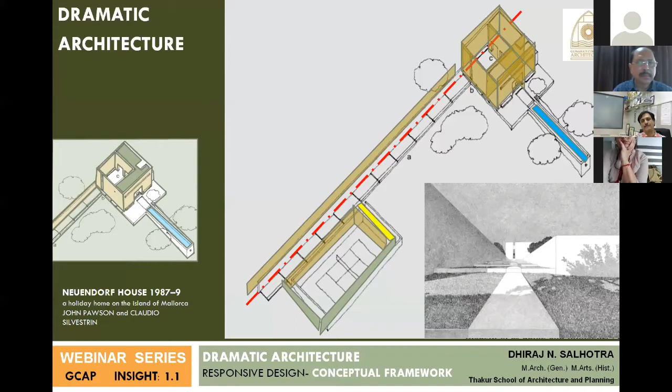Now let us see how is the pedestrian experience, the experience of the person who is walking, what is the idea behind it. Notice there is a lot of approach space, a lot of distance between the built form and the main entry, and this wall gives the sense of direction, blocking the view from one side.

As the person starts approaching from the lower level, the vision is blocked on one side, and as he steps up, gradually the landscape around starts to come out. That is how drama is created in this spectacular piece of architecture.

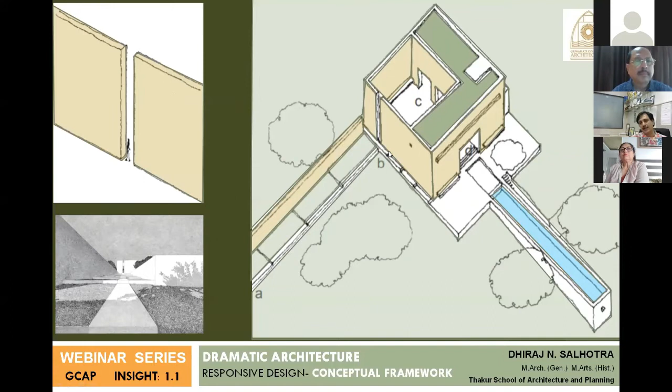This is the point of entry. It is a split, a narrow split entry which happens at point b, which you see here on the left side in that image. That split has the glass facade, the main entrance door of the building. This is the point of entry.

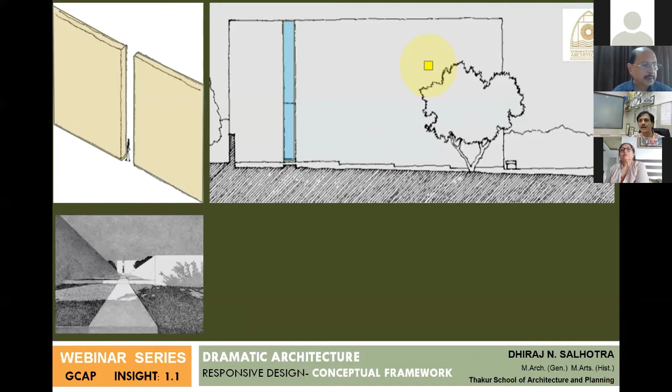Another interesting feature of this design is the square cutout, remotely and very carefully placed on the wall, so that when sunlight comes out of it in the early morning hours, it creates a glow. That is where climate responsiveness and architecture come together to create a drama of shade, sun, and light. Now this is the detailed cross-section of the building.

This is the main axis. This is the section which we referred to first.

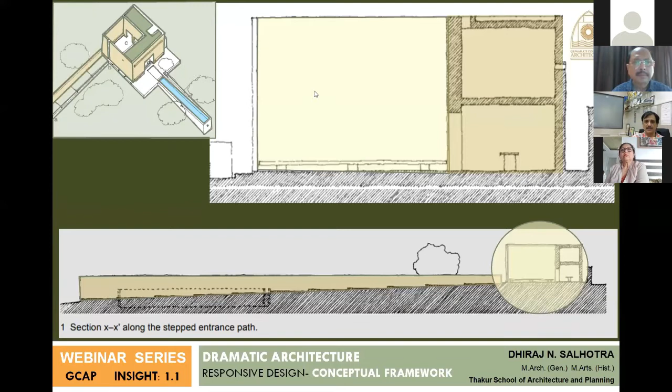Now let us see how that vista is created. This is the indoor courtyard, and this is the portion from where there is a swimming pool created, and how that vista works.

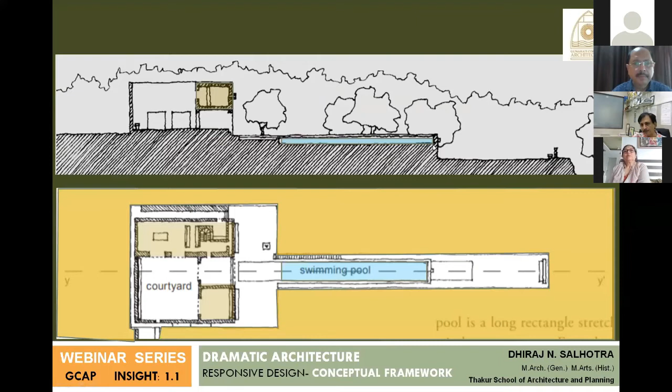You can see the visual lines, the sight lines of the user, are considered to frame the vista at this particular juncture, which is below the sectional space of a room above. And then that frames the view of the water body and the landscape further.

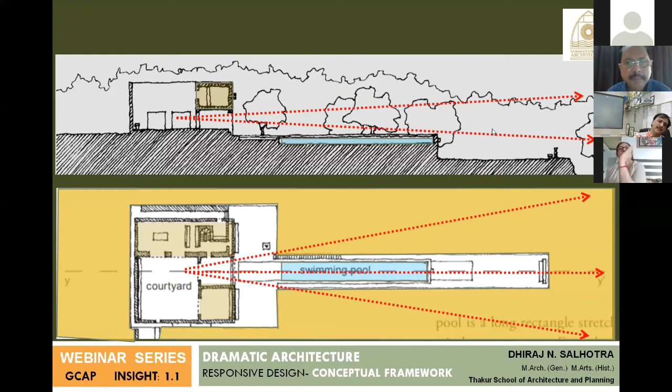So at this point, this is the framing. This is a visual frame, which you will find very commonly used in buildings of Charles Correa and B. V. Doshi. They have explored this idea of creating visual frames, popularly called vistas. Framing views is called a vista. So this is how a vista is created in architecture.

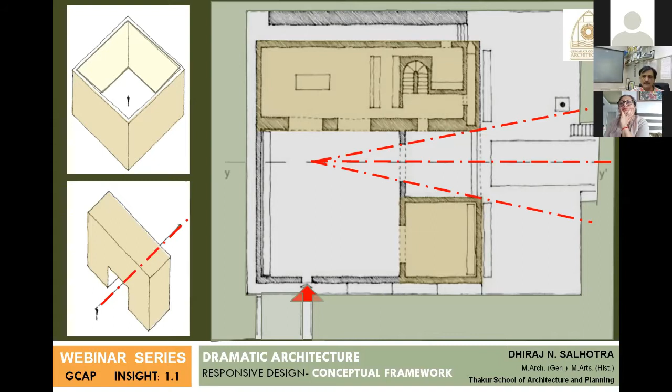So this is a standpoint, and you can imagine this is the kind of view the person is able to get - the floor line, the pool, the position of the eye level. When these elements come together, we are able to create a poetic scenery, and this poetry of architecture is what creates drama.

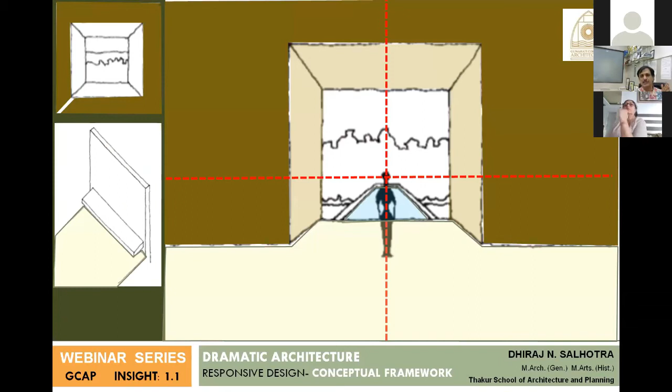Now, how can we create dramatic architecture? This is a question that many students would have. We have seen an example how it is done. Now let us understand how this dramatic architecture can be achieved. If you have pencil and paper, you can note down - I am going to share with you 10 basic tips on how to dramatize architectural spaces.

The first tip is to understand the cone of vision. Whenever we are looking straight or towards a wall, along that straight line, our cone of vision is 15 degrees above and 30 degrees at the ground. Once we understand the cone of vision, we would know how to frame spaces and how to create vistas. So your sight line of visibility is the first factor. While designing, we must keep in mind the cone of vision and how we are going to frame these spaces.

This is tip number 1. Note it down. We'll go to the next tip.

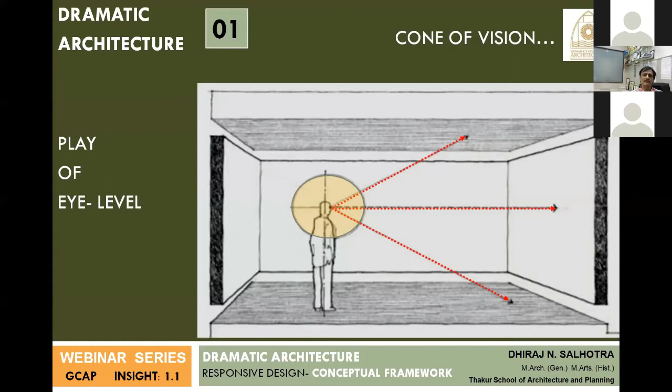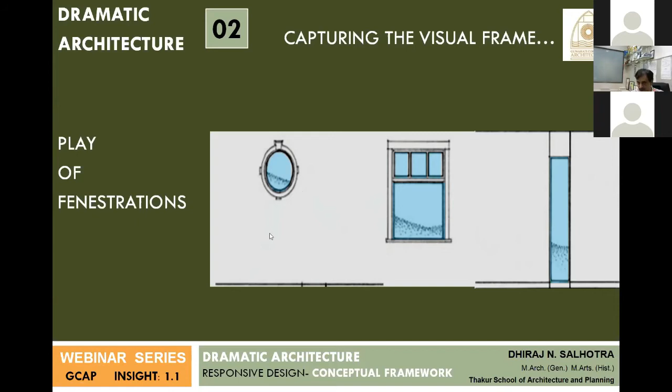Next is where we place the fenestrations. How we place them basically determines how the landscape would be viewed. It is not essential that the full landscape must be visible in a single view. How you frame it, at what level is the window, what is the dimension of the window, whether it is a slit window, whether it has a sill level, whether it is a raised window - these are all conscious decisions in dramatizing the space of architecture. So capturing the visual frame is the second tip to keep in mind, depending upon the height, location, and width, determining how that particular space is going to be experienced.

If it is for a single person viewing window, whether you are going to peep, watch, or sit and enjoy, all these adjectives depend on the size of the opening, where you have placed it, and how you have managed it in the interior space.

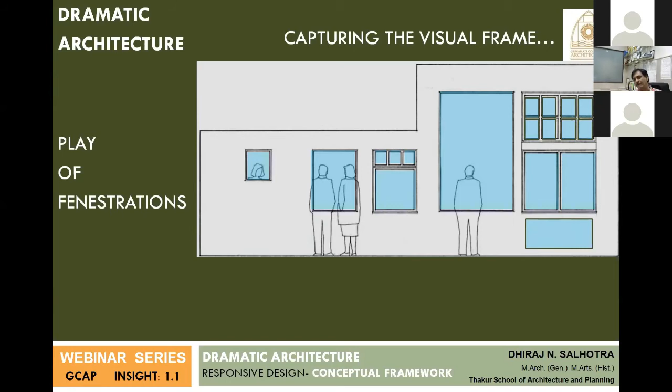If there is a small toddler or kid, the window on the right hand side at the bottom becomes an essential element. If we are not providing the small window at the bottom, the kids are denied of the outdoor view. This is one thing designers must take care of. This is one of the elements, the play of fenestrations, so capturing the visual frame is very essential.

You can see here in this example, there are 2 blatant examples. One on the left shows a framed view of a castle far away, a distant vista. There is view of the landscape on the left, and then the view of the sky, partially viewed. So the wall becomes like a photo frame, capturing these vistas. Play of fenestrations is very important.

Instead of just placing windows in a sequential manner, one after the other, or just placing them on the walls, you can decide the visual frame that you want to offer in your design. That can add drama to the site. But first you have to be there on the site, see the sight lines, decide how you can play with it, decide the size of the opening, then place them.

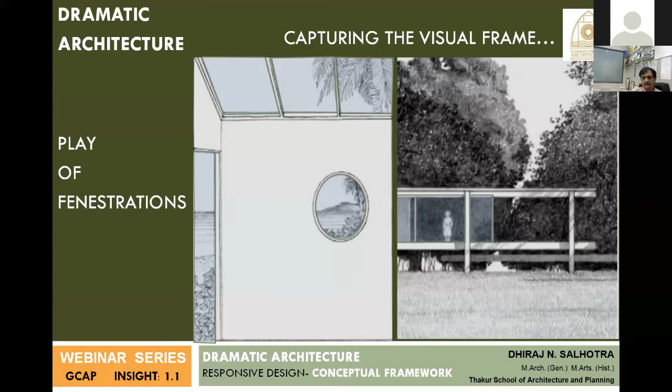Articulation of view frames. Note down this book by Rob Krier, which is on architectural composition. If you go online, just Google robkrier.in or .com, you will find this ebook available for online reading. The PDF copy is also easily available. You can download it, but definitely go through this book on architectural composition, because it offers different types of solutions on the effect of space and vista and position of openings.

It's a complete reference manual you can go through, say one page a day. This book has enough information for helping you understand how articulation of visual frames is done. I've taken 3 examples from that book. You can see how the ledge on that window in example 1, the framing columns right at the entry, or framing columns at the end of the vista, are used to frame the view in a particular manner. These tips are given by Rob Krier, who has several books, but the first one to pick up is Architectural Composition.

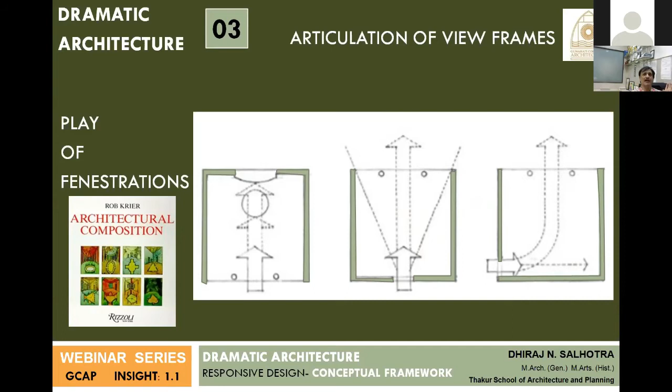Next, the important thing is play of levels. If you refer to how Corbusier talked about the Modulor man, levels are very important for us. You must know the rule of 3 inches: plus 3 inches, 3 inches, 3 inches, 6 inches, then 1 foot, 1.5 feet, then 3 feet. Using this 3 inch measure as the baseline multiplier, you will understand the various levels.

If you provide something at this level, people are automatically going to use it for sitting. The moment you raise it to waist level height, people are going to place their hand and stand like this. If you raise the wall slightly higher, the manner in which people place their elbows over it is completely different. So this height of walls, half walls, low parapet walls, or railing components, the way the height is fixed, changes the experience of the user.

There is a very important proverb where the handle of a building is called the handshake of the building. The handle is the first handshake the building gives you, so it is important to design it well. If you refer to the book of architectural details by Le Corbusier, you will find that every element he designs in a building, he places a lot of importance on all the surfaces which meet the user, especially the door handles and railings.

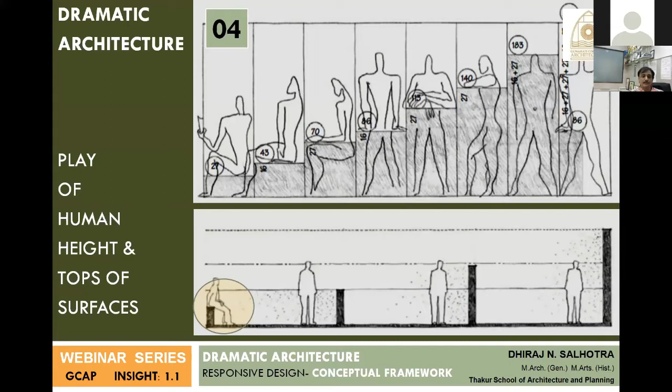The next is impact of levels, whether the space overlooks an area or the space is getting overlooked. This is very critical. Unless there is a play of levels well thought out, the level difference must be such that it should give you an opportunity to be overlooked, or to look over certain space.

The best part of human emotion, the most favorite pastime of why people go to a mall or marketplace, is they go to watch. You must have spaces for them. If you give this, it creates a sense of belonging and social inclusiveness. So this is the impact of use of levels.

There must be hierarchy of spaces, in terms of how that person is going to view down, or how the view is going to be across, under space, and the spaces outside. So the overall degree of enclosure depends on the levels of the surfaces.

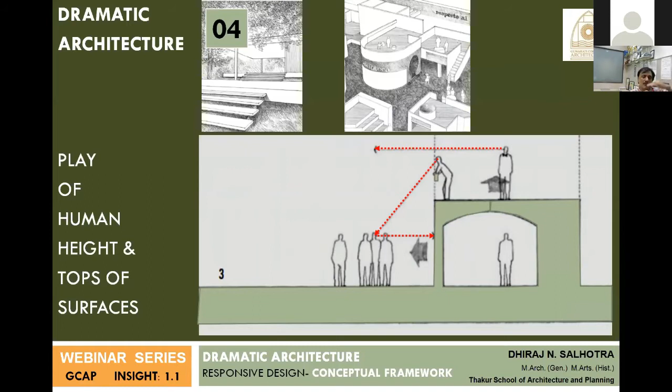We must play, a lot of play is possible in articulation, how this could be completely expressed. It could also be dramatic. You climb up to one level, then go to another, and climb up further. This makes the journey of a person from one level to another interesting.

Depending upon the scope of the project and the kind of placement where you are going to use these steps, you can make a choice of steps. Many times I have seen architecture students just taking an offset command of 300mm and putting steps 1, 2, 3, 4, counting the levels, and once the level is reached, the game is over. Instead, you can spend some time thinking about articulation of steps or staircase.

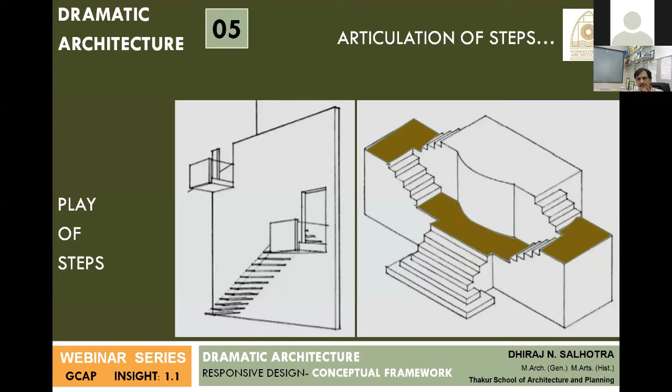I'll show you some other examples. These are numerous other ways in which steps can be articulated - it could be a straight line, dog leg, open well, half well, or L shape.

Even when you are navigating a plinth with 2 steps, longer or wider steps, this particular space becomes a space for gathering. If you are designing a bungalow or some public space, these are very critical decisions. We have to articulate steps carefully, because this is the portion every user is going to pass through.

There is a plethora of choices from which you can pick the kind of steps. When you have a staircase to design, take a pause, take some time, decide which kind of staircase is most appropriate and suitable. I bet every user will be touched by the kind of staircase you choose, because this is the most personalized travel time a person has while navigating a staircase.

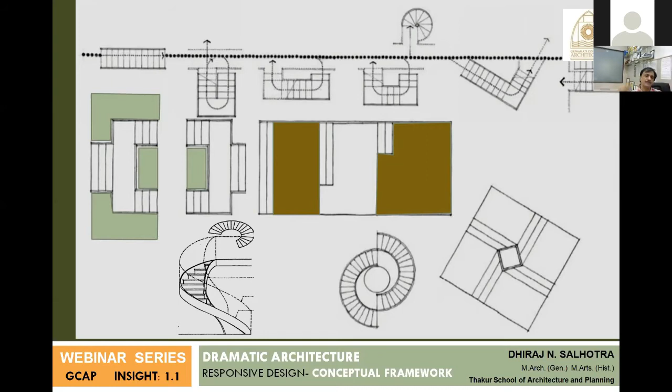The degree of enclosure has to be very well understood - what is the impact of 2 walls, one wall and one column, or one wall and 2 columns? This permutation and combination of massing is not necessarily just an orthographic projection of your plan. Sometimes you can add a wall, a freestanding column, a beam, or a pergola, and frame a visual space. This creates a transition between your interior and exterior.

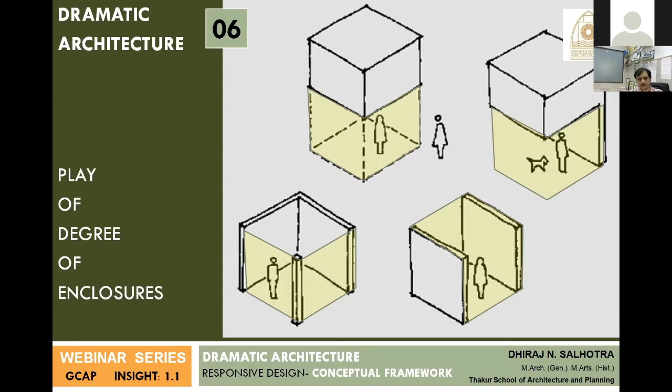A very obvious location for architecture, the obvious placement of that particular monument on top, is something which makes it monumental, but it doesn't make it dramatic. Had it been dramatic, you would probably have to shift it away from that particular top location.

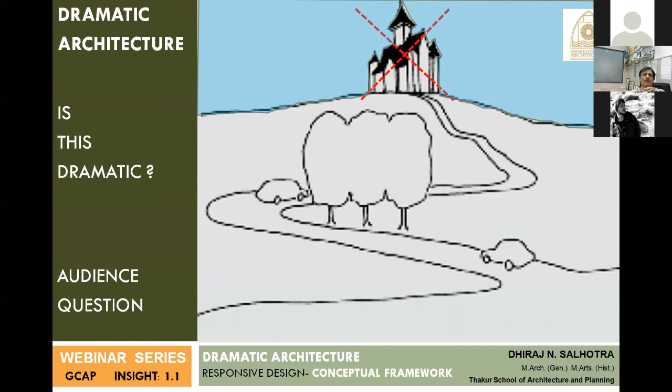This brings us to the next important tip, the big decision of how the built form is placed on the site. Now this is the view of the site. I'll show you the path of access.

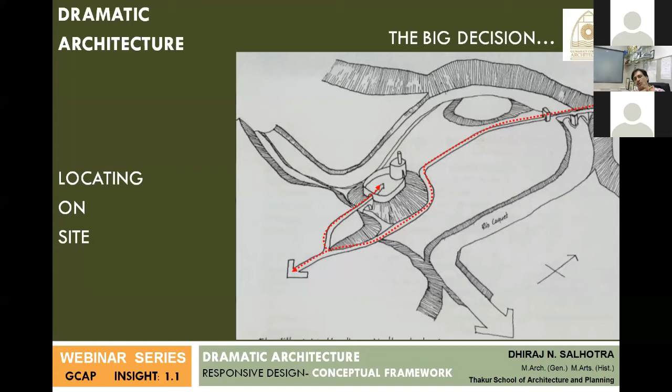So the context of the program is a critical aspect. Siting of the built form, how you place the building on the site - it's a big decision on where you place it.

Now, with the same built form, if you have a previous design project, what you could experiment is to take the same building and try locating it at different positions on the same site. If you place it straight, try placing it at 45 degrees. Try placing it at one corner. Try bringing it to the front. Then visualize your model. You will realize that changing the position or siting of the built form on the site completely transforms the view, or transforms the overall effect of the building and site.

So this is a very important tip, tip number 7, which one has to keep in mind - the context of the program. If I have to place a monumental piece, it takes center stage. If it is something which has to merge with nature, then it will merge in the landscape, it will hide itself. For solar response, you will have another kind of orientation - an introvert or an outward looking building.

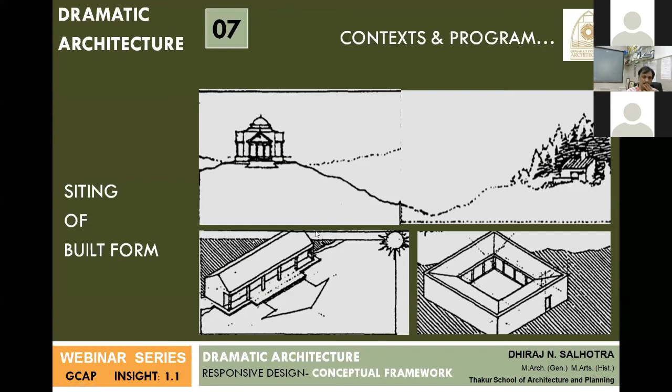This is the play - this is tip number 8. It is magic. Very few architects have great command on it. One of them definitely is Le Corbusier. However much you study Le Corbusier in terms of lighting, it's not adequate, because in his buildings he's a master of natural light in design. There's a particular statement by Corbusier - he says that he knows how to make human faces glow. It's a very strong statement because he has control over the lighting.

So light plays a very important role, and especially if you study most of his buildings, he does very good light and shade play at the entrance. I'll show you some examples of how entrances have to be designed. In entrances, just don't keep an entrance wall plain like that - play with it. Either pull it out, create a porch, or recess it back. That is what adds drama. Keeping plain entrances doesn't create any interest. So play of entrance is very important, because this is the first impression that a person entering the campus or premises will remember. The entrance is the heart of the design.

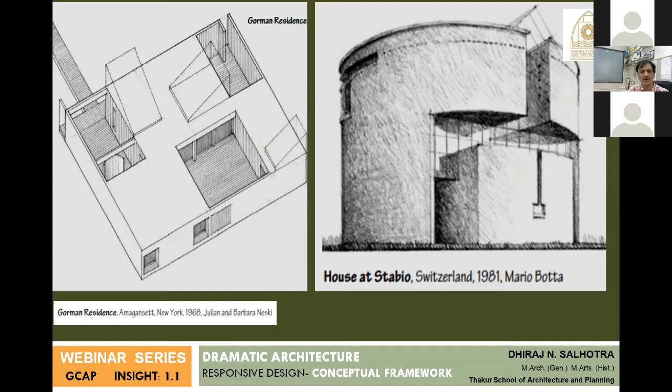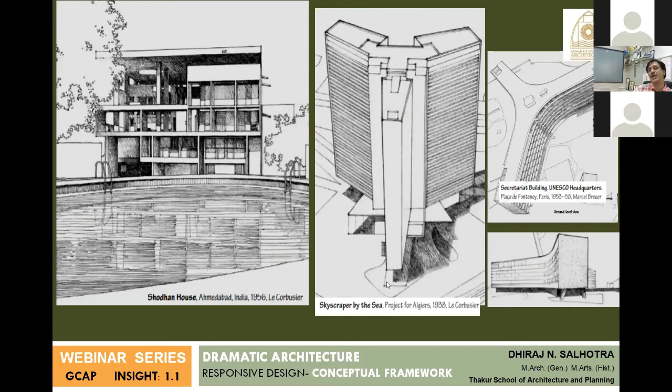Several other examples - this is Shodhan House, the Secretariat. Again, deep recessed shadow - maybe the main entry is a small opening, but see the kind of shade gap which is created.

This is an interesting picture - this is the Robie House. It is one of the most photographed buildings in the world. So many people take photographs, and whenever they come back I ask them, where did you see the entry? In fact, this is a building in which the entrance is not visible. This is the most photographed building, and the privacy of the user is not affected, because Frank Lloyd Wright - I will give you a challenge.

Try to locate the entrance in buildings of F.L. Wright. Have you noted the challenge? F.L. Wright always hides his entry to the building. You will never see a gate like gate, you will never see his main entry to the building.

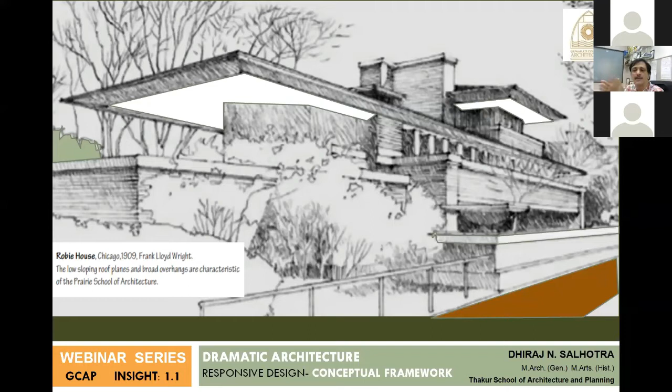Even in the Robie House, this is actually the back side of the building. This is not the front, but this is the most photographed side. You will be wondering, where is the entry located? So the entry is on the rear side. This is the portion from where we saw the image, and this red arrow mark shows the entry.

He used to always hide the entrance of the building, because the moment a person is able to read the entry or read the built form, then there is no interest. That is what F.L. Wright believes. So this is one approach of how entrance can be hidden from the main view to create the drama.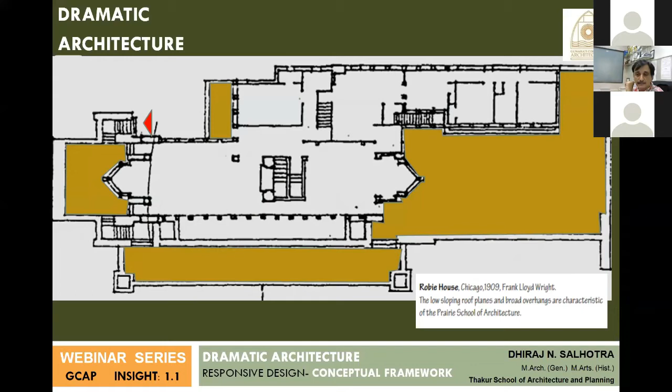Look at Corbusier. In contrast to F.L. Wright, Corbusier will make the entry as loud as possible. And look at the sheen, you can see the shine on that RCC slab that he has got. RCC as a concrete, as a material, has a sheen or a shine on it. How is it possible?

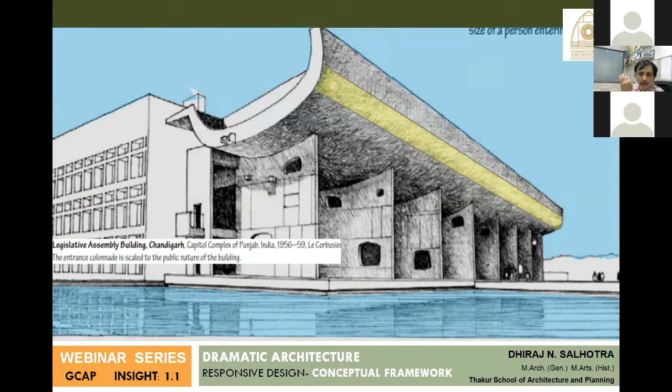This is the portion where you can see the shine. He tilts the angle in such a way that the sunlight just brushes across this particular canopy, and that allows for that surface to shine like a metal sheet. The concrete appears like a metal sheet. If you go to Chandigarh, you will find that it has that sheen on it. The concrete is able to do that, because of the shade and light and shade that he is able to achieve.

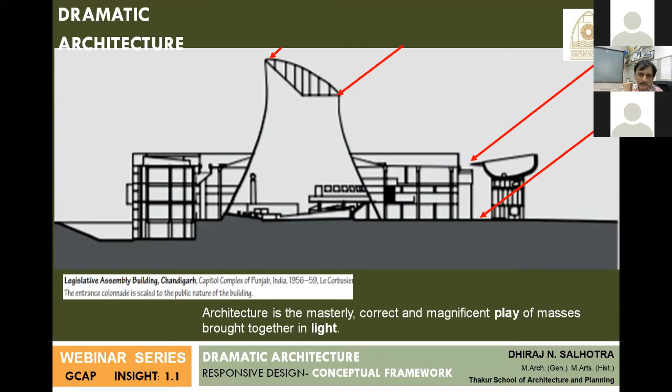Again, an example of how entrance has to be treated. The main building is behind. This is the front, the Brise Soleil detail which he has got, a very monumental piece of architecture. This is the plan of that building, this is the front area. This is Millowners' Association in Ahmedabad.

I will demonstrate how he has done the play of shade and shadow. This is the kind of light effect throughout the day, every day you will get this light effect. The shadows will start growing up. So this drama is the use of built form, fins, openings, light and shade.

The sunlight does the job. So this is the detail, these are the fins that he has added, very cleverly placed. The solar angles have been understood, the entrance area has been defined. And this is the kind of drama that every photograph captures.

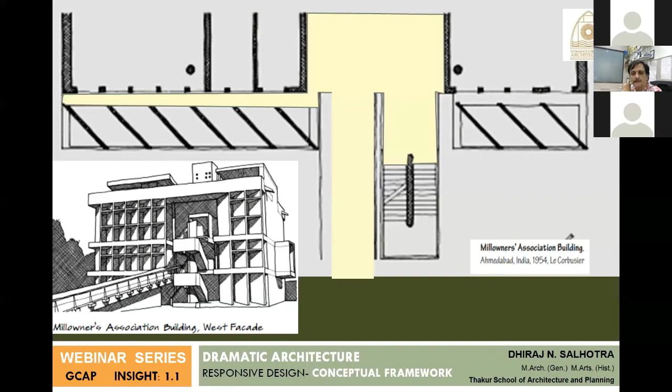This is one project which I want to give you all as homework to do: Villa Mairea, by Alvar Aalto. Not many students of architecture are a fan of Alvar Aalto, but I tell you, if you want to understand how planning is done, how a very robust concept is developed, you must read Alvar Aalto and his works. He is one of the most pioneering modern architects, very systematic in his approach. The only drawback to his architecture is it is not blatantly beautiful.

You will never find a form for form's sake. His buildings are highly functional, highly efficient. So as homework, I know architecture students have a lot of work to do, but this one project is something you must make it a point to study in depth, and that is the Villa Mairea project. It is not very difficult to get information on this project, you can Google it, you will be able to find about it.

Don't just see the images. If you see the images of this project, I'm definitely sure you will say there is nothing interesting about it. Read about this project, this is the only project that I would say one student must read. Because if you read about it, you will know how conceptualization is done, how great his architecture is. His architecture is human architecture. So this is one takeaway exercise that I want the students to take up: explore this particular project.

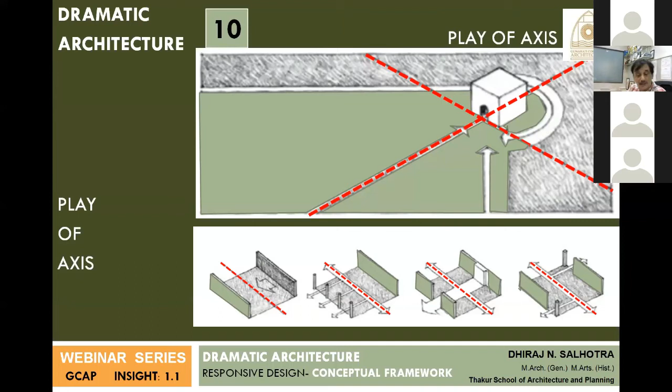The first and a very obvious axis is the frontal axis. We don't normally use this axis. Nobody wants a building which is bang opposite or right at the front. This is only used for projects which are monumental in nature, public buildings or buildings of civic significance, or important buildings like the Taj Mahal, which has a frontal axis. This is a very strong axis, and you must use it only depending upon the scale and type of project. You cannot use it for institutional buildings or for a school.

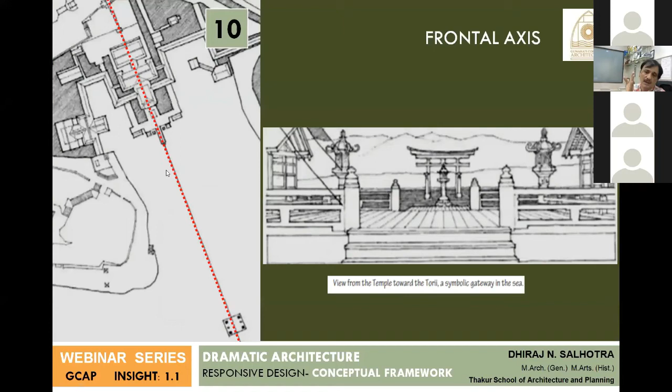Even for residential bungalows, you must avoid blatant entry towards the building. You will find this axis used for large monasteries where urban design principles apply symmetrical axis. You will find its use in projects of civic significance where formal architecture or formal geometry is used to show power. Basically, this frontal axis is used to show power.

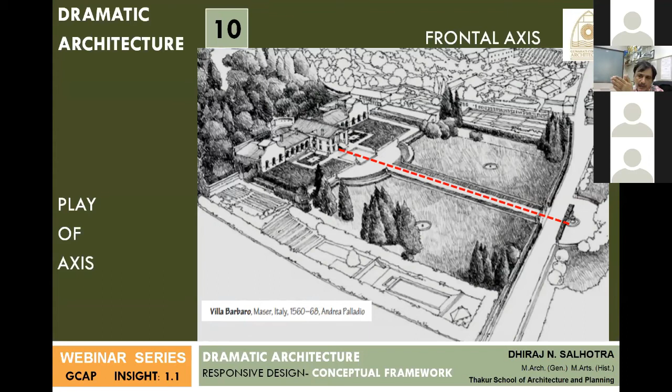Another interesting way to develop, one of the most interesting ways I would say, is to develop a slightly tilted diagonal axis to the building. When you create a diagonal axis after moving straight, it creates movement in your experience of the building. The building will start appearing as if it has rotated itself. If you have a model with you, you can pick it up and check that particular movement of the built form. You tilt the axis slightly, and the whole experience of enjoying architecture changes.

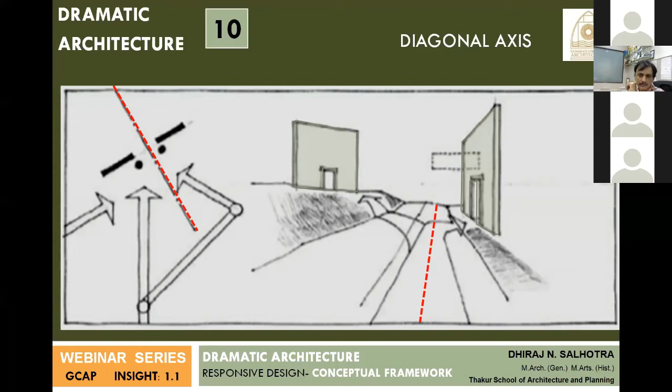You will see the use of this in Philip Johnson's Glass House. Philip Johnson has a diagonal axis to his Glass House. This is an example of diagonal axis to a lateral plan. It did not mean that your building has to fit it. You can see over here, all the buildings are perpendicular, orthographic, but your axis is diagonal, and that gives you two sides of the building in view.

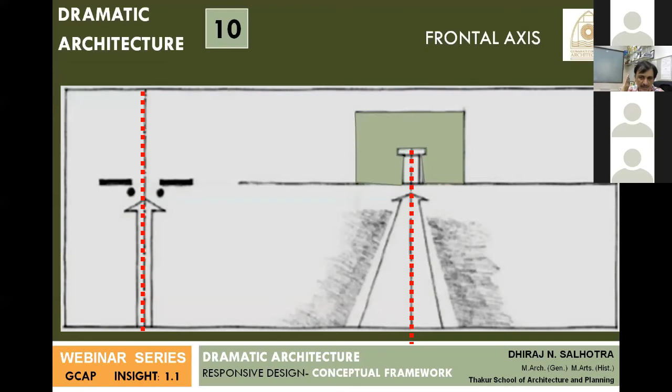Just let me go back. The biggest issue with a frontal elevation is you will see only one dimension. It appears as a two-dimensional building. The building looks like a wall. But when you give a diagonal entry, you get to see two sides, or a two-point perspective. So when you see a building in two-point perspective, it gives a different feel altogether.

So the axis plays a very important role, especially when you have a large plot, you will be able to plan your axis very well.

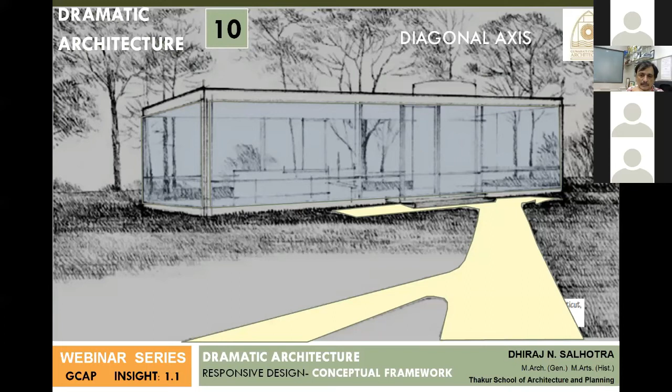In master planning, especially housing projects, you create an experience for the person taking a walk. This is a very interesting axis to reach that particular structure. You can see the path goes around a mound and then reaches there. The building almost vanishes at one particular point and then reappears. This is a very interesting way of developing, and again it will depend upon project to project. If it's a small project like a bungalow where you want to create this kind of dramatic effect, that the building vanishes from the side and suddenly emerges, you can do this.

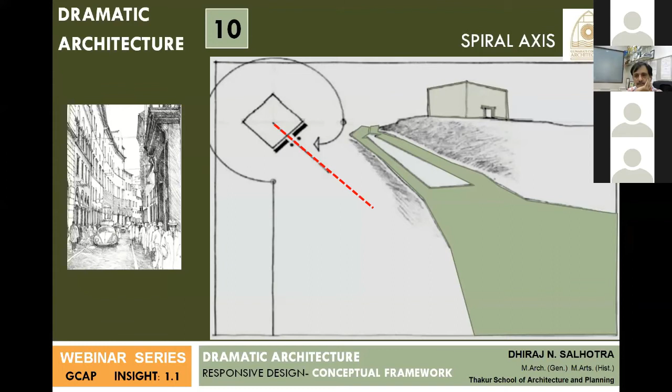This is a very interesting example. I don't know how many of you will try to visualize, but just imagine the model is in your palm, and you are able to see the eye movement of how that entire bungalow will appear to rotate. If you are moving by car at very low speed, you will be able to see almost as the building rotates around its axis and gives you the full profile. That's the kind of experience an axis can bring into a project.

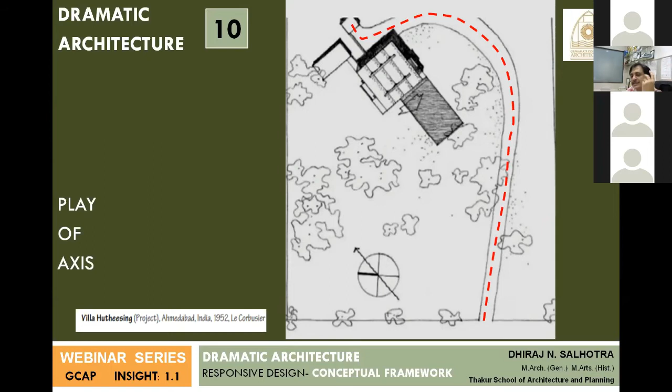Okay, so this completes part one of the session.

Now I will quickly take you through three very popular international projects. Many of you must know this building. This is the Kaufmann House, or the Fallingwater House, by Frank Lloyd Wright. But a lot of times this detail is not available — what kind of site Wright got, how he conceptualized this program, and why he built it like this. In some of the slides to follow, we will see how he conceptualized this masterpiece.

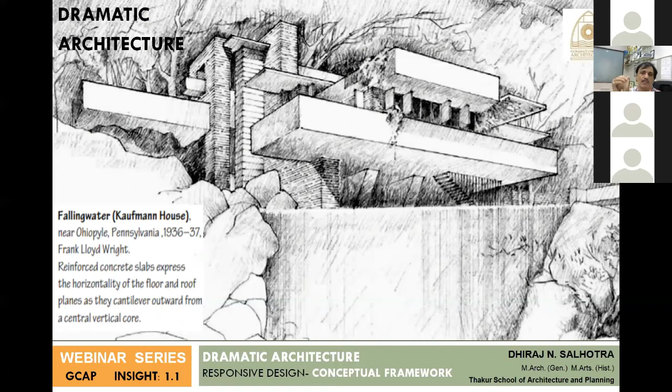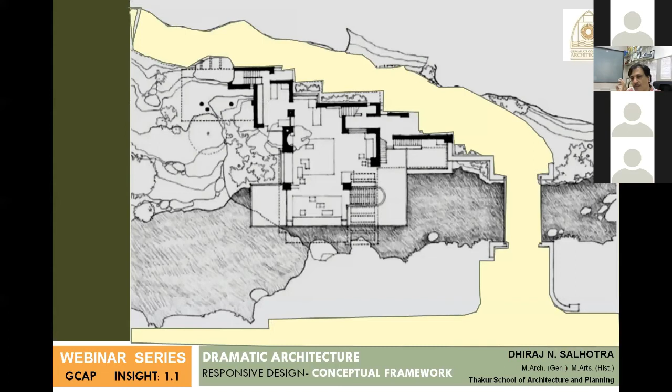But what Lloyd Wright had to do is he had to move out of the plot. He had to build over the river and over the waterfall. And that is how he arrived at the floating terraces.

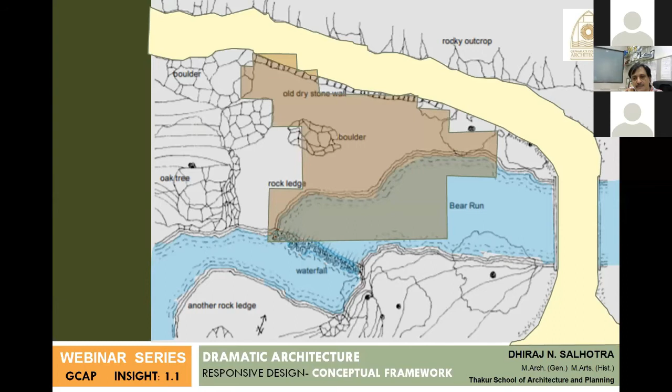I'll just demonstrate how layer by layer this project was developed. This is the first layer. He created a main entrance and he created a hearth, which is the fireplace. He added a fireplace next to that stone, and that became the element of design.

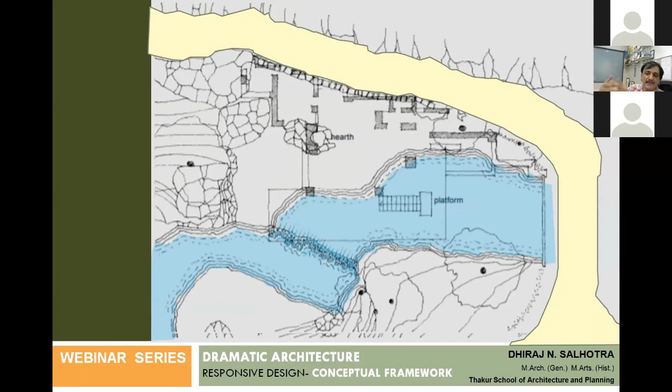Then he added the upper level. This is actually the portion which is above the stilt. And this is the floating deck which went over. He had no choice, the site was only half. He could not have otherwise built on this particular site unless he could have taken cantilever on the river.

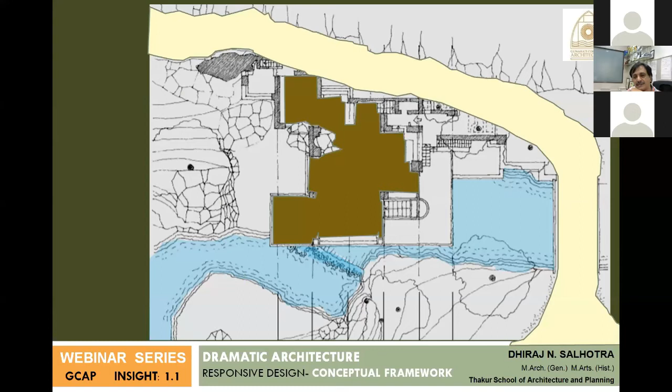This is the floor plate. You can see that at various levels, this is the lower level stilt, and then from the first floor deck it flows out, and then a vertical wall which acts as an anchor for other slabs to follow. On the right side, this is the bridge from where the access is.

This is the detail of buttresses and floor plates, the terraces. You can see the thickness of the slab because of the cantilever.

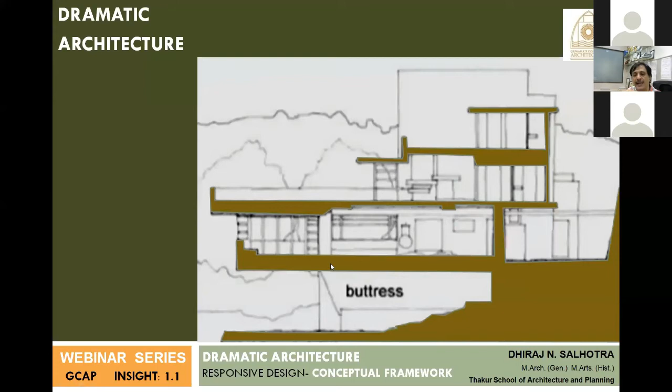So he took this inspiration from Japanese tea houses, where he saw how a project from a distance appeared. Probably this was his source of inspiration for this particular project, where the Japanese tea houses were built cascading or almost cantilevering into the lake and using a bridge to access. This is a similar condition which Wright had for his Fallingwater, and this project finally was done after his visit to Japan. So probably he had visited some of the tea houses, taken inspiration from that and translated it into this building.

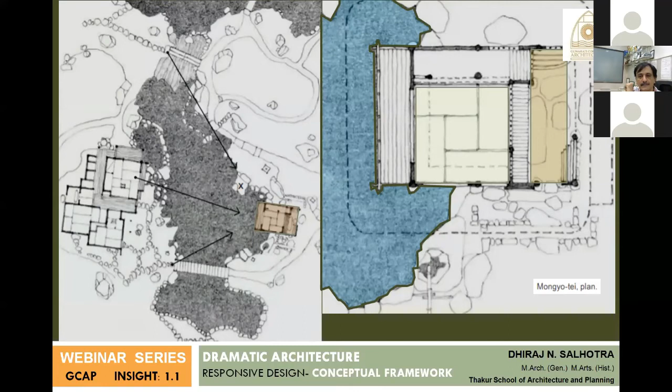This is the famous Schröder house, Bauhaus, again having interlocking masses.

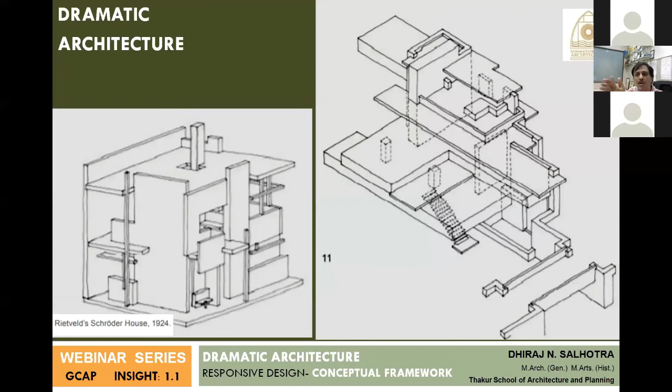Famous project of Corbusier, Ronchamp. Ronchamp is another world's most photographed building. But what makes it photogenic?

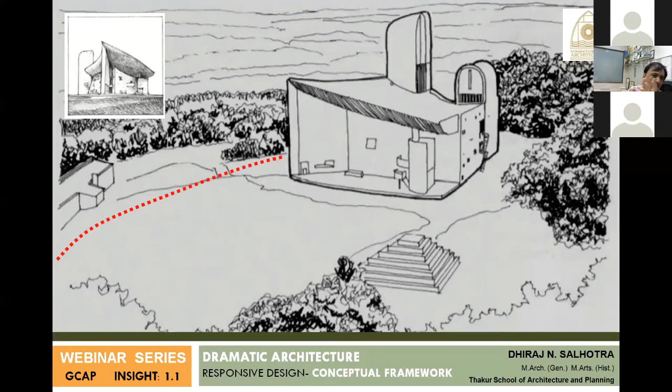Again, few principles like the approach to the built form appearing as if it is rotating around its axis. The user experience is almost like a hilltop site.

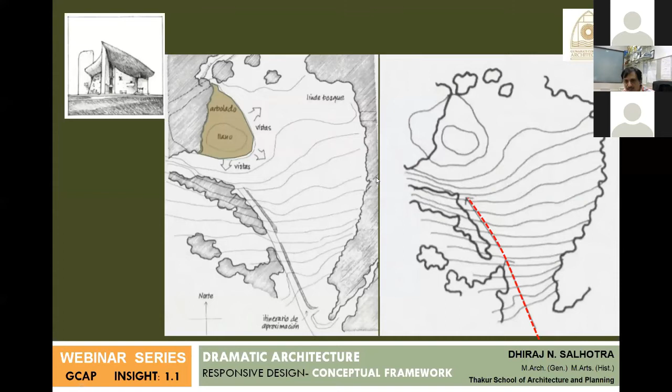There is a steep access to this particular cathedral of Ronchamp, and the steep access is along the ridge. And once they reach the top, that is the juxtaposition of axis which he had planned. He added a curved wall over here on the right side, and that is creating the shade and shadow. This is the kind of axis.

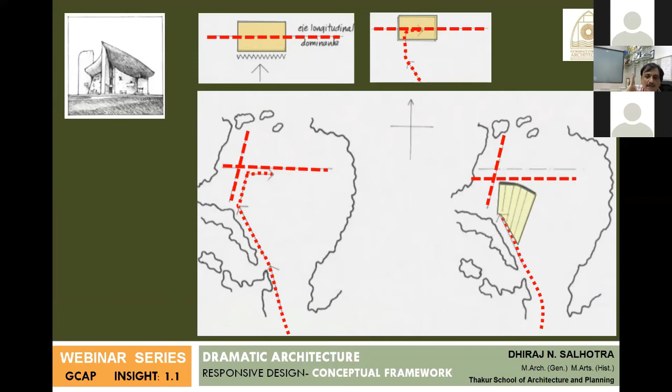This is the approach. This is how the people will approach the church. And see, this is how the concept was developed.

So he marked the pathway, the user experience, and tilted the wall. This particular wall was tilted so that the user experience is that they are entering from a slit on the side. Again, a dark niche or a shadow to the scale of the structure.

That's the front space.

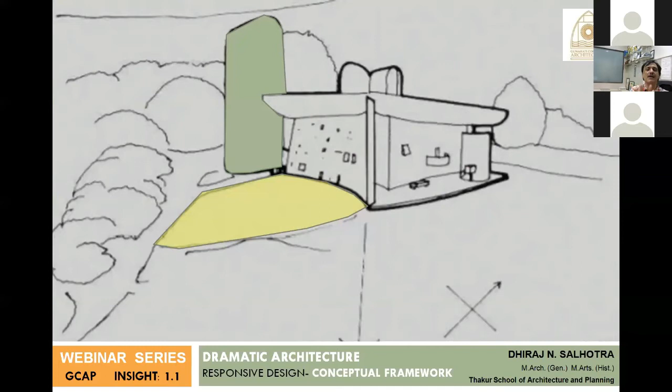And this is the axis which is pointing. This is the pointer that the building points out towards the approach. The person's first view of the Ronchamp as they go up the hilltop is this angle. And the building almost points out to the person who is approaching the building.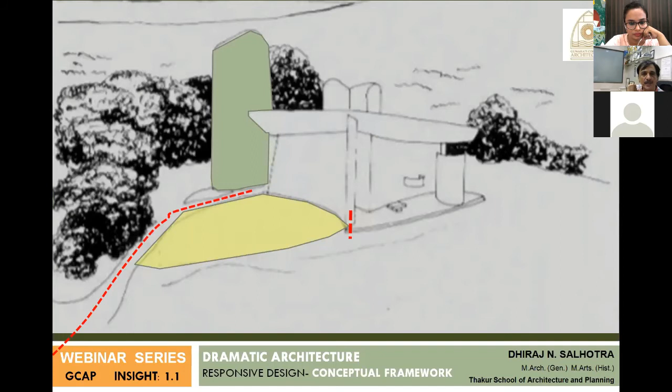And then you go around and you reach the main entrance. Now, this is the pointing. This is how he has taken the axis. The fins have been placed.

Very clever piece of sculptural architecture. This is more like a sculpture.

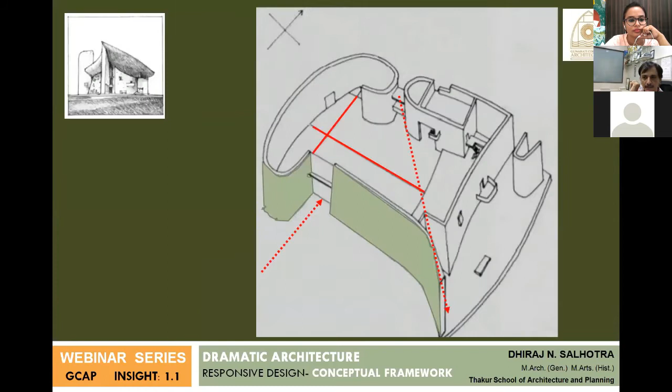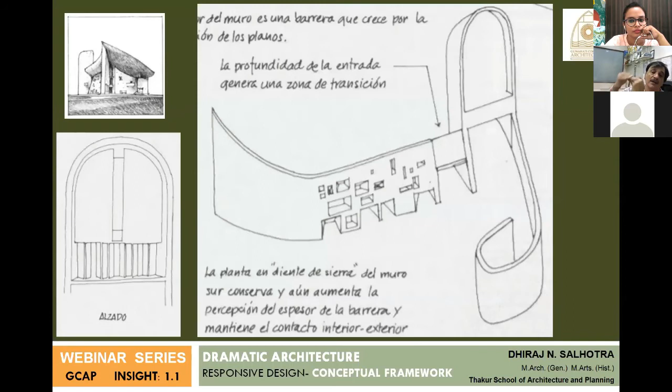This is the inner wall details. It's a fantastic building to study for lighting design. This is how there is a small slit which he keeps between the structure and the walls of the building to create a dramatic effect of light and shade.

There is a curved canopy, and the light penetrates into the building through the slit, and then every shuttering mark used on that particular cast slab creates shades and shadows. It's such a beautiful piece of architecture. Even the shuttering marks left on the surface of the building all give the shades.

That's the quality in the buildings of Corbusier. He not only used concrete, but he allowed sunlight to play its own role. And all throughout the day, the various conditions of light will change dramatically the interior scape of the building.

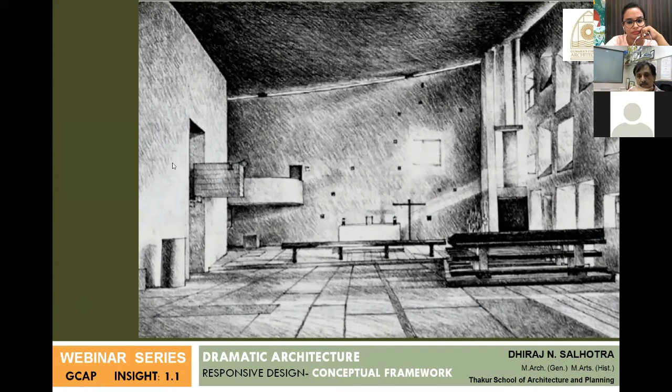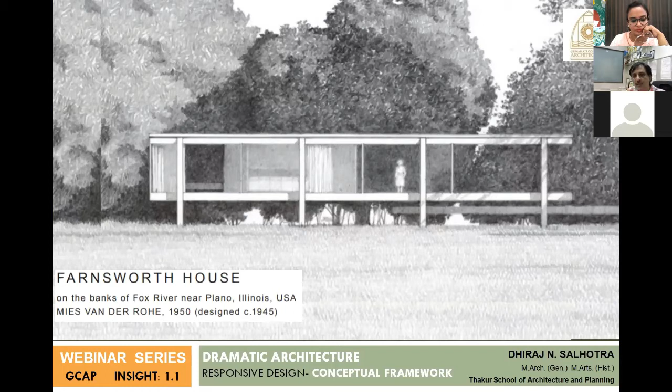The next most photographed building that we would be discussing is the Farnsworth House. This is the last example that we are taking up. The Farnsworth House is quite similar to Philip Johnson's glass house, but what makes this project unique?

It's on a huge site. You can imagine this is the kind of site he has got, and see the location of the building. It's a very minuscule project.

Look at the kind of axis the architect chooses. The entrance is not frontal, the entrance is on the rear side. The main view, what you get, is the frontal view, which does not have the entry. It is actually the back side of the project.

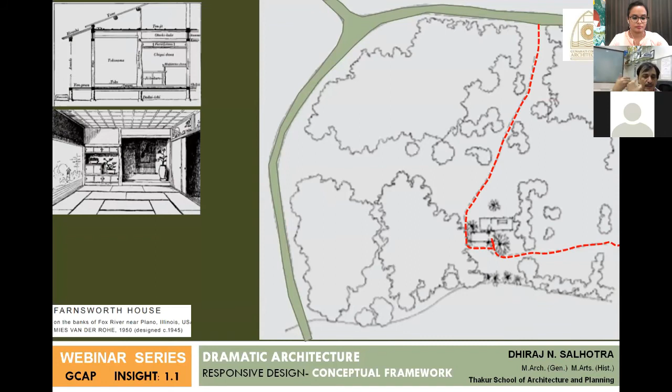The earlier design had a load-bearing construction. This particular project was earlier designed as a load-bearing building. Many of you must have only seen the steel chromium-plated columns, but it was supposed to be a load-bearing structure. Later, Mies van der Rohe decided to do it in chromium-plated steel columns and glass. See the transformation from the original design to this. So this was one decision taken, from load-bearing to this, and this is how it is placed.

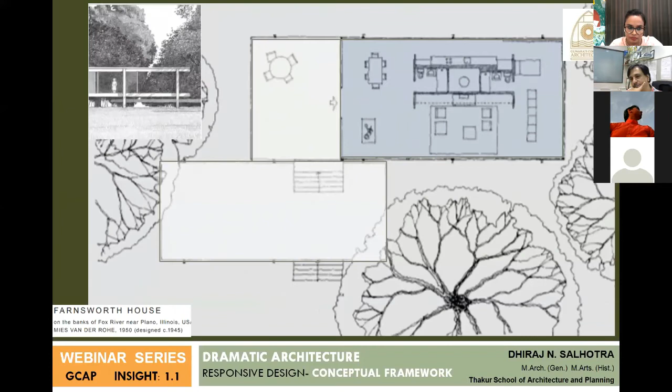This is the view a person can gather from the site, standing inside the building, looking out. The changing color of the landscape is the biggest USP of this particular project.

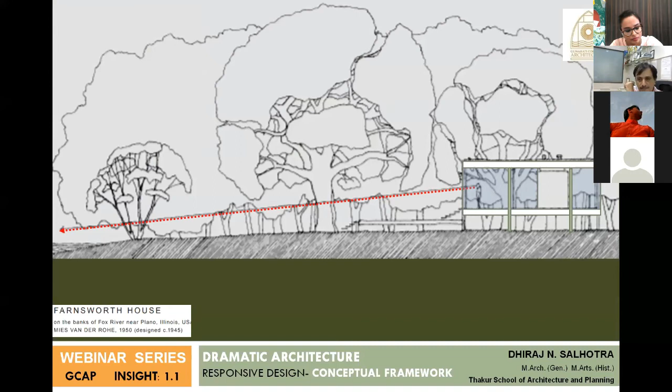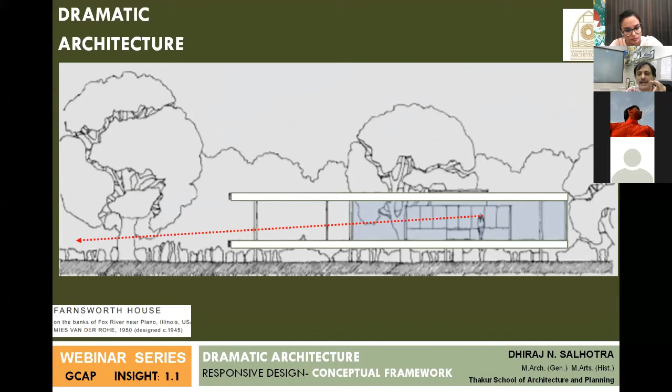He created an interactive building with the outdoors, with sight lines that framed the view for the person inside the building. The shade is there, but the visual connectivity is continuous. This is the exterior view of the building with the deck, the entrance deck, which is on the rear side.

See how the building enjoys the landscape, separating itself from the ground, allowing the colors of nature in. The most interesting feature is the shadow of trees on the white surface. He makes use of white so that the shadow is there, captured on the canvas of the building.

So this is the result. The climatic and seasonal changes change the beauty of the landscape, and this becomes the most photographed building for every season.

So after the presentation, how would you, as students, go about it? Don't forget those 10 tips that we have discussed. Apart from this, I don't know how many of you are into reading, but there are some easy to get PDF copies online. I'll suggest some books you can refer to, so you can have a relaxed time and start reading them.

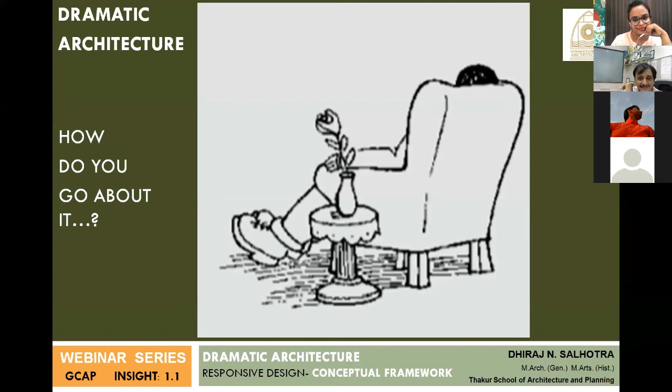If you get time, you should always read through the book Le Corbusier: Analysis of Form by Geoffrey H. Baker. And you would not believe there is actually a book called 25 Buildings Every Architect Should Understand. This is a sign that, if not all the books in architecture, at least you should know these 25 handpicked buildings.

This particular PDF copy is always available. I can share the link, and you can also find it online through Google search. But this is a book every student of architecture must go through at least once in their 5 years, and read at a leisurely pace.

Understand one project at a time. You may not understand all 25 buildings, or may not be interested in reading all 25, but at least know 5 of them in depth. Then probably, yes, you are somewhere there.

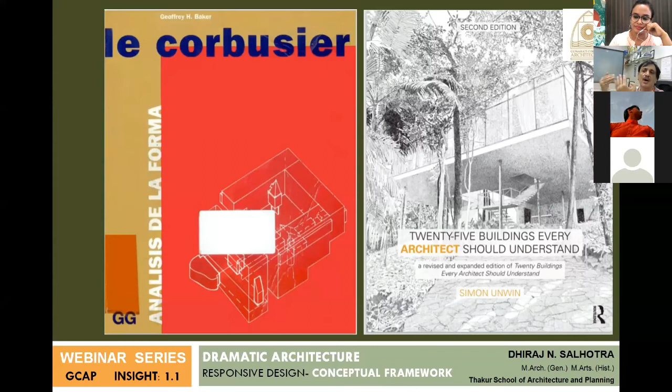You will know how to add dramatization in architecture, using these 10 lenses we discussed as tips. It will always help you in analyzing all the architecture that you see around you.

There are other books too, like Form, Space and Order. Many times, a student of architecture only picks this book up in the first year for basic design to understand form, but then later on we start losing touch with this book.

I tell you, even if you are in the higher classes, the planning program, or the 4th year or final year of architecture, you will have a better understanding reading this book then. Don't think this is a book only for first year. So please pick up Form, Space and Order by Francis D.K. Ching, and go through the details given in it.

You will definitely be inspired to see all the theories that we talk about, dramatic architecture, you can correlate in the examples given here. Luckily, Francis D.K. Ching has also come out with a book called Building Structures Illustrated. You need to translate conceptual ideas to physical design. So one book allows you to think conceptually, and the other tells you how to convert these ideas to design. Use these two books together and you will have a comprehensive knowledge about design methodology.

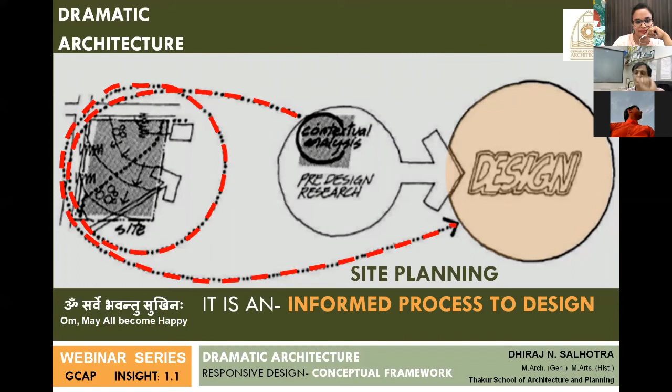And you always remember this vicious circle, which is lifelong learning. Learning is a lifelong process, so don't forget to again go back to the basics and reboot. So we keep evolving, and the best time to evolve is only now. So don't lose this moment. I think this is the last slide, and I can pause here.

I'll keep the session open for discussion.